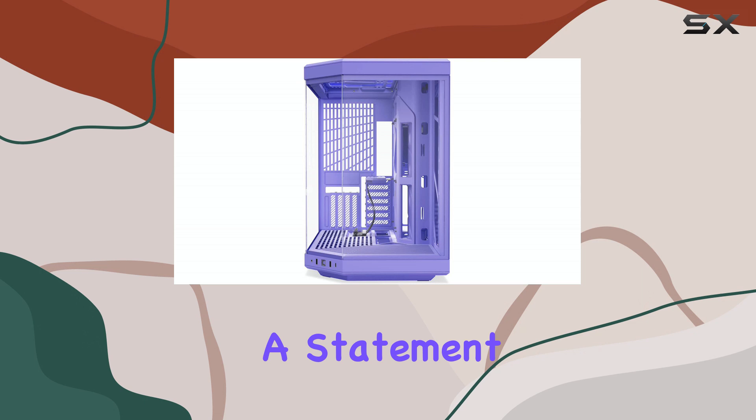Right out of the box, the Taro milk purple hue is striking, offering a soft, creamy aesthetic that immediately sets it apart. It's also available in other colors.

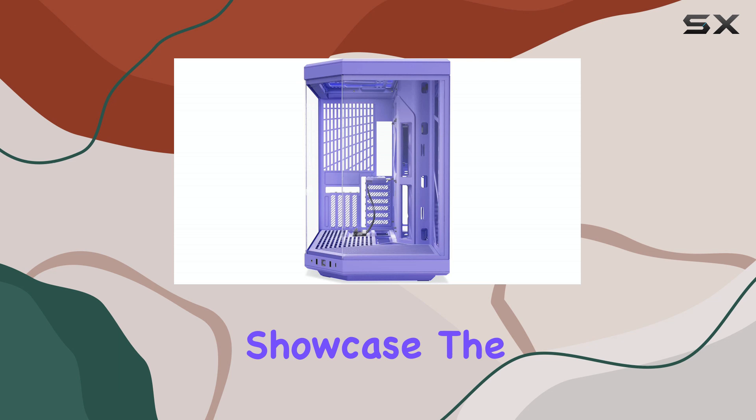The three-piece panoramic tempered glass design provides an unobstructed view of the internal components, turning your build into a showcase. The dual-chamber design is intelligently laid out, separating the heat-generating components from the rest, which aids in cooling efficiency.

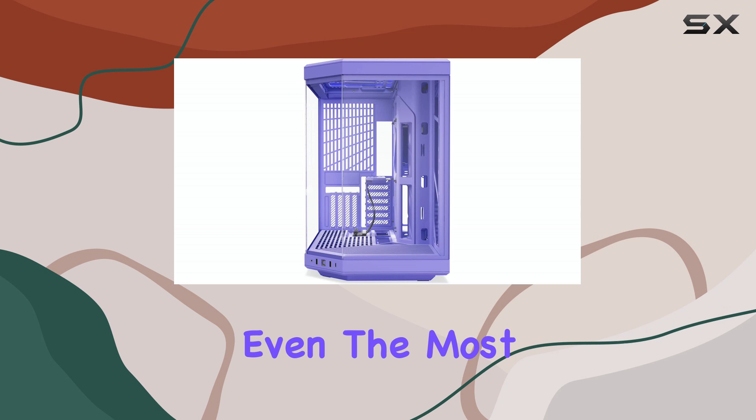Speaking of which, the Y70 boasts impressive cooling capabilities. It supports up to a 360mm radiator on the side and an adjustable top, ensuring even the most demanding CPUs stay cool under pressure. The cold floor cooling option, accommodating either three 120mm or two 140mm fans, is a welcome addition for those pushing their systems to the limit.

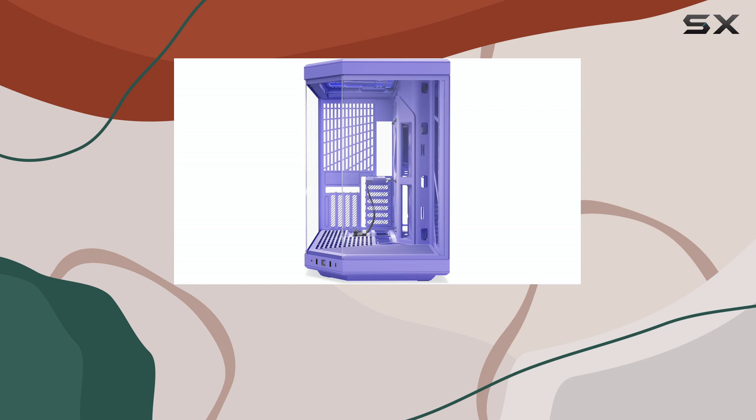The inclusion of a color-matched PCIe 4.0x16 riser cable is a thoughtful touch, maintaining the visual harmony of the build. The 4-slot vertical graphics card mount is perfect for displaying your GPU.

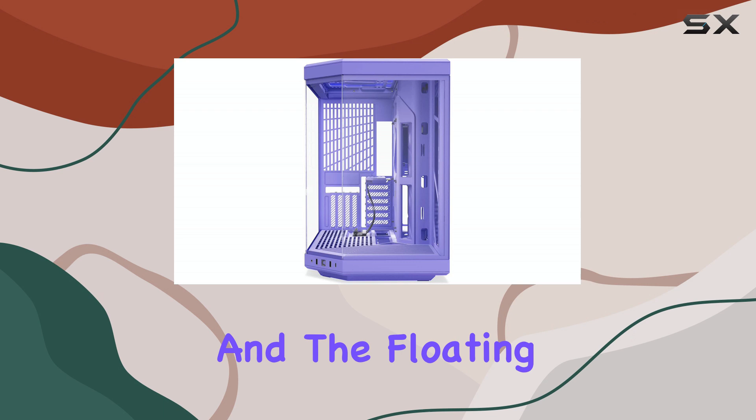HYTE has paid attention to the small details that elevate the build experience. Helpful labels guide you through the process. Reusable Velcro straps aid in cable management, and the floating storage sleds keep things tidy. Even the clicky blue power switch adds a touch of premium feel.

The toolless panels make accessing and modifying the system a breeze, and the ample cable management space in the rear chamber ensures a clean and organized build. The Y70 is built with tight tolerances and high-quality materials.

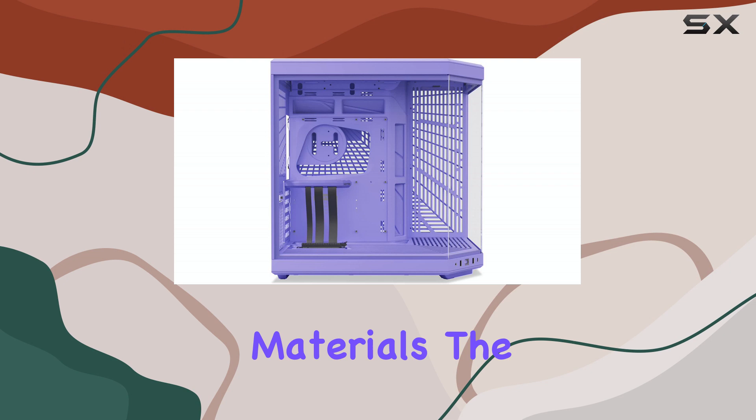The HYTE Y70 is a well-thought-out case that combines aesthetics with functionality. It's a great choice for anyone looking to build a high-end gaming PC that looks as good as it performs.